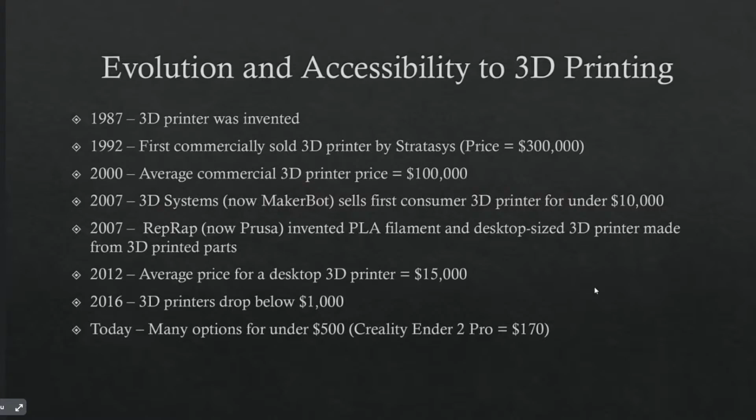Okay, before I get too far in, just kind of looking back on where 3D printing has been and where it is now. It's really advanced a lot in the past decade, but it actually started in the 80s, when the very first 3D printer was invented. Back then, as with most computer devices like printers, they were very large. It took up most of a room, and the first commercially sold 3D printer, later in '92, sold for $300,000.

So it wasn't something that the average Joe or the Elmer was picking up and doing these tiny little projects with their ham radio. So that was to come later. But as technology advanced, prices went down.

That kind of went down through all this. And 2007 was kind of a big stepping stone, with a lot of other brands coming online, as well as printers that were made up of 3D printed parts, which drastically dropped the price of manufacturing the 3D printer. And now these 3D printers can, for the most part, build themselves with the help of the few metal pieces and computer boards and stuff that come along with it.

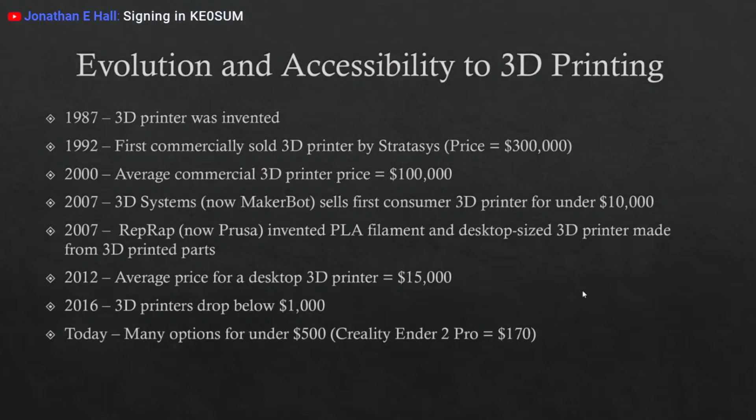So after 2007, pricing started dropping. In 2016, like I said, just 6 years ago, 3D printers finally started getting below $1,000, getting a little bit more affordable to the average consumer. And today, you can go to Micro Center or go on Amazon, and there's many options for under $500. For example, the brand new Creality Ender 2 Pro, their smallest entry level printer, is $170. So really low cost entry at this point. It's not what it used to be just a short 10 years ago. So cost of entry is pretty small.

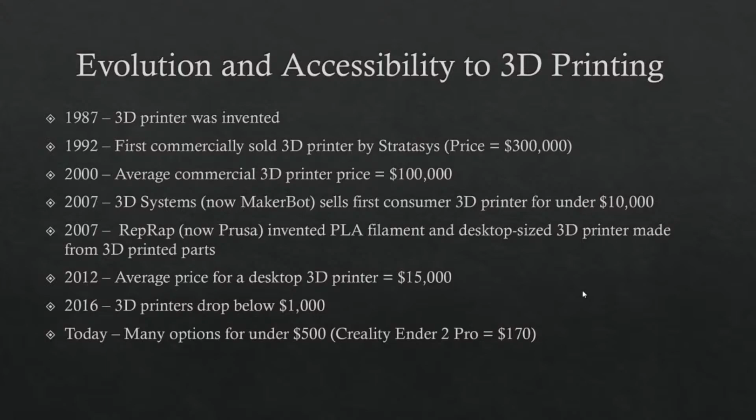But why would anybody get into 3D printing? What do you do it for? What I use it for, mostly, is very low cost prototyping. It's things you can print, try out, see if it works or not. And most of the time it's just a cheap filament, a biodegradable plastic that you can throw away or reuse or grind up and use again.

It's a chance to put your thoughts into a physical object without having to know how to use all the expensive woodworking tools or metalworking tools, and a huge shop with all those things, and a little bit more of a detailed product than gluing something together or cutting freehand. It's also something that you can produce in house. You don't have to wait for something to come in the mail or for shipping, and if you want something today to fix a problem or adjust a plug for one of your radios, you can print it today and have it today.

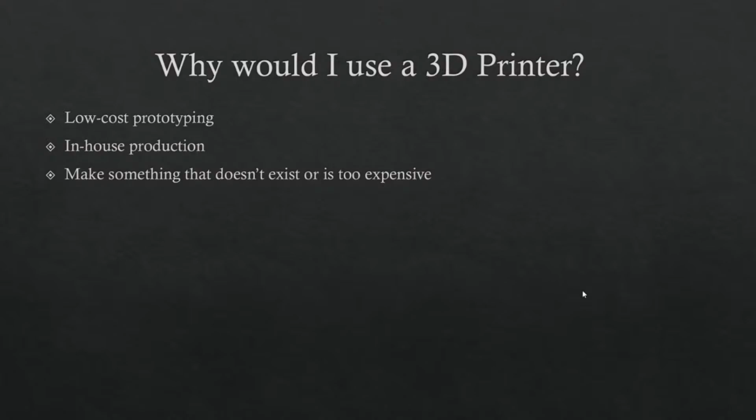And also, maybe this thing that you're thinking of in your head doesn't exist in the real world. And I know that happens a lot with ham radios. People are developing their own enclosures, their own mounts, any type of thing that we feel needs to fit this niche that either doesn't exist, or does exist but is way too expensive because it's made of aircraft grade aluminum, and it just needs to be this little thing to hold my microphone in the truck. So many reasons why you might justify getting a 3D printer.

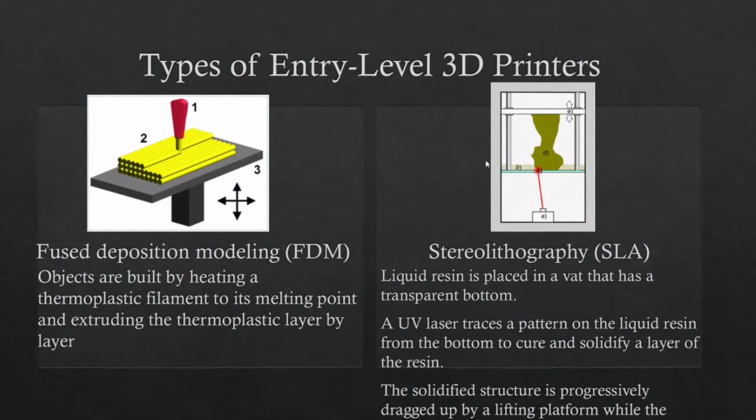So the types of 3D printers out there are at least a dozen different types, but for entry level, they're kind of down to these two. The first one on the left being the most common, fused deposition modeling. That's what you're going to see most people have. That's what I run. It's essentially you're melting a plastic filament, running it through a nozzle, and that nozzle is running on a controlled CNC rig to essentially lay out a pattern, a layer, think like a hot glue gun, and then raising it up a set distance and doing that layer again, building off of each other over and over and over until the final product is built.

The one on the right, still layer by layer, but how it does it is actually a bath of liquid resin, and a UV laser actually traces the pattern on a build plate, and that build plate is slowly raised out of the resin bath to build your product upside down. So essentially it's suspended from the build plate.

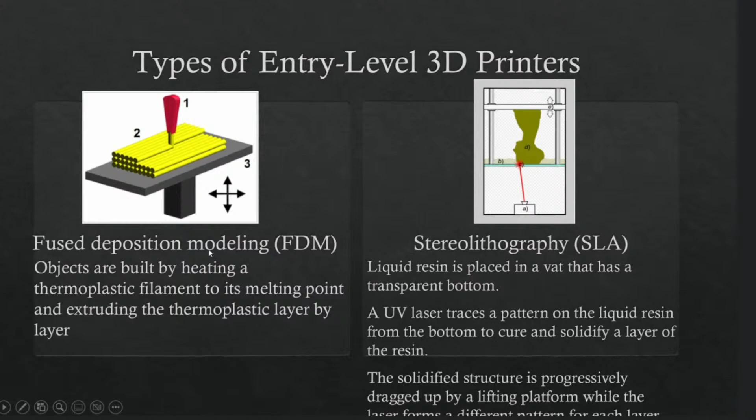Benefit of SLA resin printers, they're much more detailed, they're finer detailed. The cured resin is a much harder product, and so it won't melt or get soft in hot sun. SLA resin printers are typically used in medical, dental work, those types of things. But for 99% of consumers, myself included, the one on the left, FDM printers, is more than enough for what we use it for.

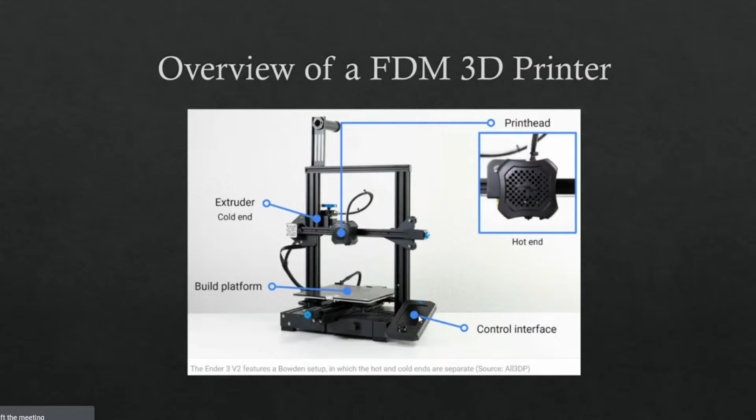So the ways you can be adjustable with FDM printers is the types of filaments you're going to use. Not only what color, you can use any color you can imagine, as well as gloss or matte or transparent or reflective, but there's also different plastic materials. Polylactic acid being the most common, PLA. It has the lowest melting point, so it's the quickest to melt. It's the easiest to work with. It's the cheapest. Like I said before, it's biodegradable, so when you're done using it, you can grind it up, you can throw it away. It's very easy to print. The settings are pretty standard, and any FDM printer off the shelf can run PLA.

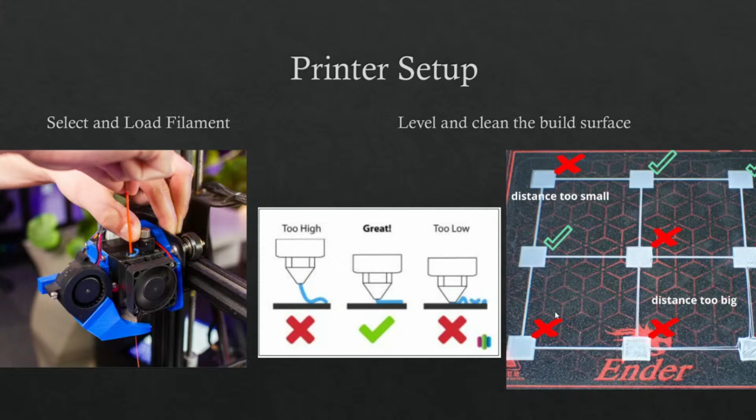So your filament is loaded. You've printed 1 or 2 or 3 bed leveling programs. Your printer is now leveled, loaded, and ready to print. But what are you going to print? You have an idea of something that you want to exist. Best thing to do is to start and see online and see if it already exists.

So there's many different databases online that you can search, Thingiverse being the one I use most often. You go on there, you just search like it's a Google engine, search for Yaesu or Toyota, whatever you're looking for, press search. It'll come up with all the files that somebody else has already designed and went through the effort to build up in their software, and it's all open source.

There are ones out there that the designer can sell, so you have to buy the file, but there are almost endless free options. The one time I've actually bought an STL file was, like I said, when I used TPU for that phone case. I wanted to make sure it was exactly for the iPhone 12, iPhone 10, whatever the phone was, and specifically made for TPU filament.

So it was a very specific need. Couldn't find it anywhere in the free files, so I found one that a person was selling for $2, paid for it, and it worked perfectly. So I threw out the term STL before I go any further. STL is the most common file format for a 3D model, for 3D printers.

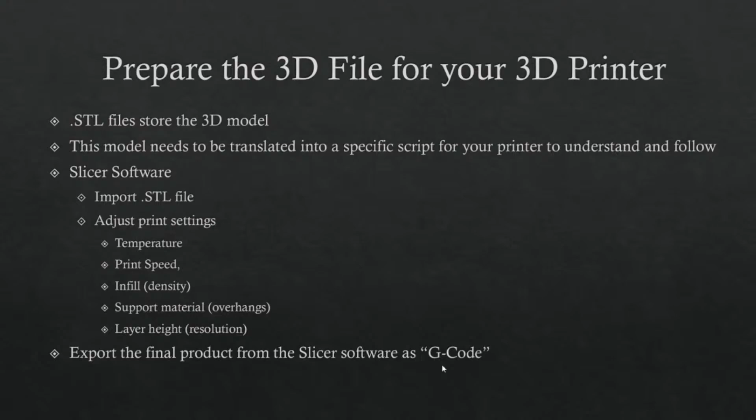So if you have ever used any CNC type machining, you'll probably recognize G-code because CNC uses the same term. It's just the programming language that any machine that's run off of a computer uses. So that G-code is basically going to list the commands in a certain order that that machine needs to follow. Everything such as setting the temperature, using the tool path, so where this tool needs to go, where it can't

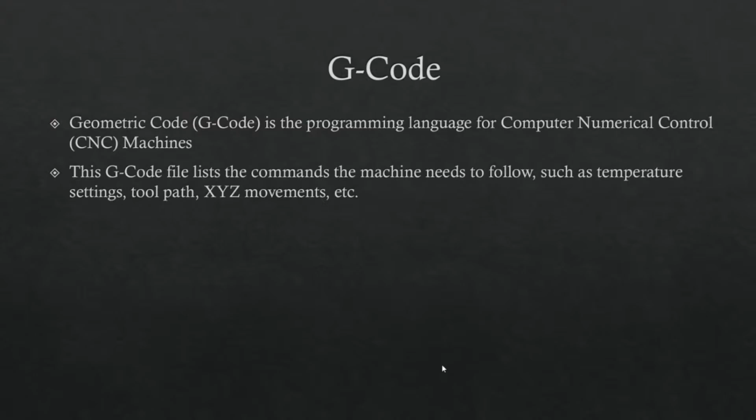go, all of the X, Y, Z movements for this entire product, and then when the print is done, where does the tool need to go and how does it shut down? So everything from start to end will be in this G-code file that comes out of your slicer program. So you have your object, you download the STL, you went into your slicer program with it, and you adjusted all the settings for your specific printer, exported to a G-code. Now it's time to put that into your printer.

The most common ways, you'll either have the printer plugged straight in with a USB cable like you would your traditional paper printer. You could save that G-code onto an SD card, a micro SD card, or just a regular SD card, and most printers have an SD card slot where you'll put it in that and use the interface on the printer to actually select the file out of that card and press print on there.

Or the third option is send it to your printer through the internet, which is the setup I have. It does require a second computer to be connected to your printer. So the setup I have is I actually have a Raspberry Pi that is dedicated to the printer. So it is connected to the internet and it is USB connected to the printer, so I can send things to the printer wirelessly.

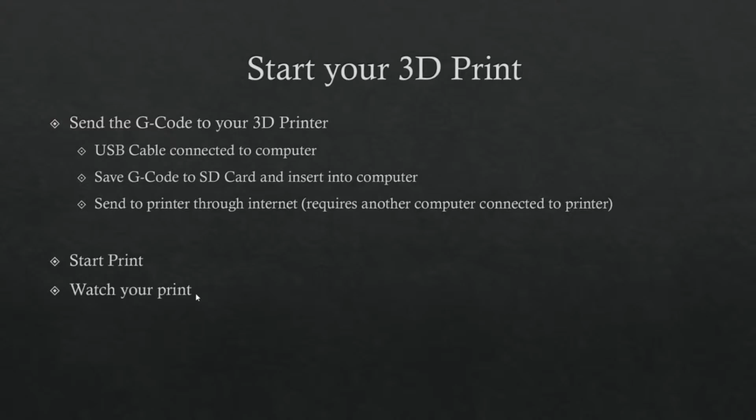So it's in your printer, start your print, and then the important step is to watch your print, at least the first layer, just to make sure that everything is going correctly, that you don't have any issues, the temperatures are right. Because usually if something's going to happen, it most likely might happen in your first one or two layers, either adhesion issues or a clogged filament or your temperature isn't right.

Which leads me to my next one, troubleshooting. Troubleshooting is guaranteed to happen if you're going to get into 3D printing. It's part of the hobby, I would say, but it is usually resolved within a few actions. So some common issues you'll run into: adhesion to your build plate. So your product is not staying stuck to your build plate. Either it's getting lifted up, or it might have just come off altogether to where it's no longer on the build plate anymore, and now your printer isn't printing on anything. It's just shooting plastic in the air.

Or warping. Warping is what you see on the right side here. So maybe the first layer did print fine, but then the second layer came on hot, and then as it cooled, that thermal pull lifted that corner off because, again, you don't have good enough adhesion on that corner.

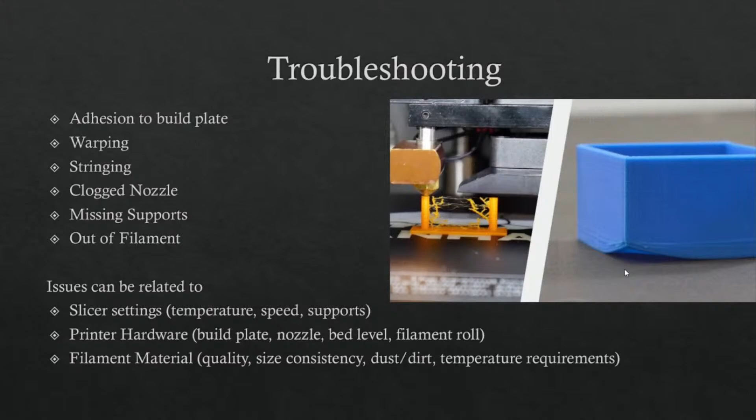Stringing is what you see on the left here. It's building, like I said, those two legs of a table. So it's building up this one, then it's going to go up and build this one, and it's going to go back and forth, and it seems to be just dripping a little in between each time. That could be something as simple as you're just not retracting the filament before each one, and that's another setting you can do in your slicer program.

Other problems: your nozzle can get clogged. You forgot to put supports on, and it's going to try to do the tabletop and just start spitting plastic all over the side, or you're going to run out of filament in the middle of the print. And hopefully your printer has an out of filament sensor so it'll pause. But either way, it means you need to put new filament in and hopefully be able to continue your print without any glitch.

Overall, most issues you're going to run into are going to come down to a setting in your slicer program. So you're going to go back and turn up the temperature or turn down the temperature. Maybe it's too hot, too cold. Just play around with it. Maybe you're going too fast, so maybe you slow down the speed of your print head. You forgot to add supports, so you need to add supports, or the infill wasn't enough. You need to increase your density.

So lots of different ways you can go back and trial and error. And again, that's part of this, and that's why PLA, low cost. You can print it multiple times to get it right. And usually once you figure out the unique intricacies of your own printer, you won't be having to go back and forth as often. It could also be a printer hardware issue. Maybe your build plate is just getting too old. Maybe you've printed on it too many times. It's just wearing out. Nothing's going to stick to it anymore.

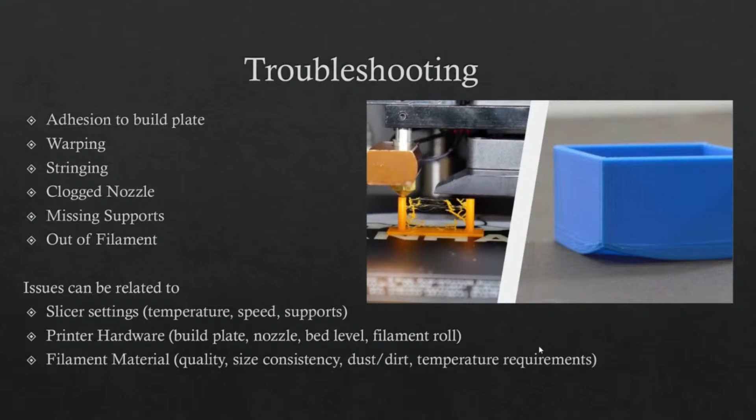Okay, so you went through all that, you printed your product, maybe it messed up and you had to go back and adjust some settings, and you sent it back to the printer and it printed just fine. So the printer spits it out, it's cooling off, so you're able to take it off the build plate. So there's going to be some post-print work that you're going to need to take care of. If you have support material, you're going to have to remove that, and sometimes that's easy, sometimes it's just on the bottom of the table.

Sometimes that support material is in a really tight little inside hole that you have to get in there with needle nose or tweezers or a razor blade and be able to get that out, because you wanted to make sure that that bolt hole was an exact circle and it was way in there.

You're going to want to assemble your parts. Being a 3D printer, the build plate is not big. You're about limited to a 10-inch by 10-inch square of build surface area unless you buy a bigger one. So a lot of times the way to get around that for bigger projects is you're just building them in pieces, and you can assemble them. Either they click together or super glue or other fasteners that are built into the print file.

If you want a clean finished product and you don't want to see tiny little layer lines, you can sand those smooth and prime and paint, and you'll never know that it was a 3D printed product. And a sharp razor blade or a scalpel is your best friend, just to clean up some little goops on the edge or on the sides where the nozzle had a little bit of a hiccup, just to make your product a little cleaner.

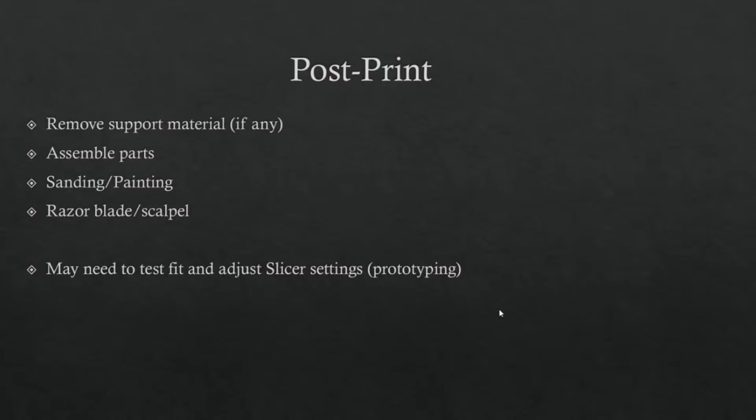Any questions from the slides so far?

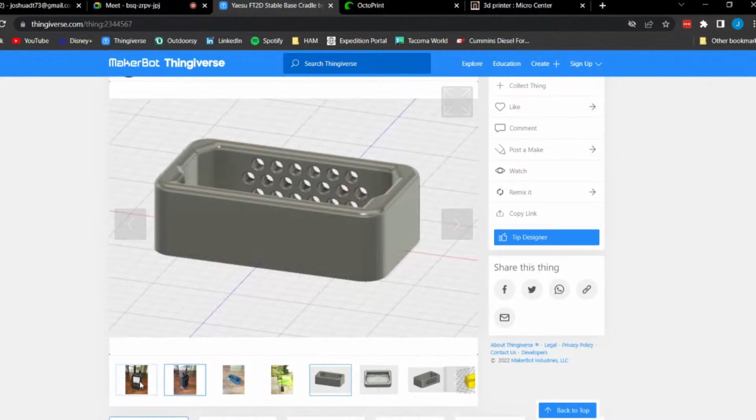Say, okay, I want to print that. You can come down and read. They'll tell you a little summary of what it is, why they did it. And usually the most important thing is you're going to come here and see their recommended settings. They'll say they use this printer. Doesn't really matter that much, but they'll say, yes, you do need supports. I printed it at this resolution.

That's the layer height, 0.2 millimeters, and I use 20% infill. Those are all pretty standard. 0.2 is just the standard resolution. 20% is your starting infill.

Rafts is basically if you have adhesion issues, you can have your printer print basically a base, like a stage first, before it actually prints the product to make sure you absolutely don't have any adhesion issues, to make sure it's absolutely level. You basically get all that out of the way with this sacrificial raft that you build under your object.

So you can go through here, look at comments and stuff like that, but I'm going to go here to the file. Looks like he did an update. He rotated it. So if I go to the files, you'll see he included F3D, which is a file that I can bring into a 3D modeling software. So I'm not going to mess with that right now.

Here's the STL file, but he said he did an update. So that's this one, version 2. He updated July 10th. So, okay, that's the file I want. I'll go ahead and click download on that one. Okay, so it's in my download folder.

So once it's downloaded, I'll go to my slicer software, like I said. So I use Ultimaker Cura. This is the slicer software. So this is where you're going to download whichever slicer program you want, put in what printer you have. So I have the Creality Ender 3. I'm using just a generic 0.4 millimeter nozzle, which is plain PLA, nothing fancy.

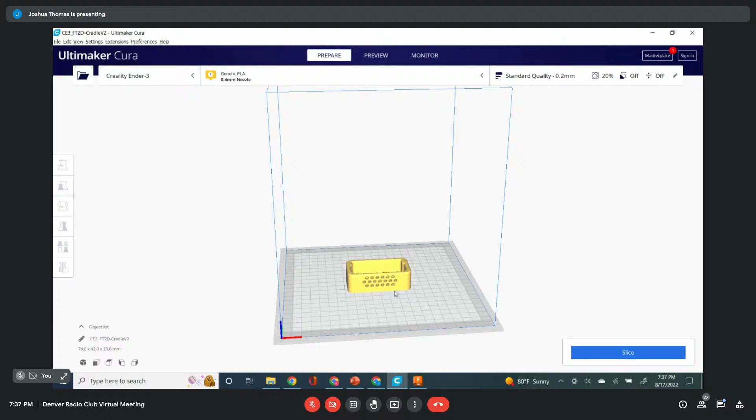And I'm going to find that file we just downloaded. So there it is right there. Okay, so that looks right. That looks like the base, the cradle we just saw on Thingiverse. So we're getting close. So now here are all the settings that you can adjust. So he said the resolution of 0.2 millimeters, and that's standard. If you wanted your layer height to be 0.16, 0.12, much finer quality, you can, but it's just a base for a radio. I don't think it needs to be too.

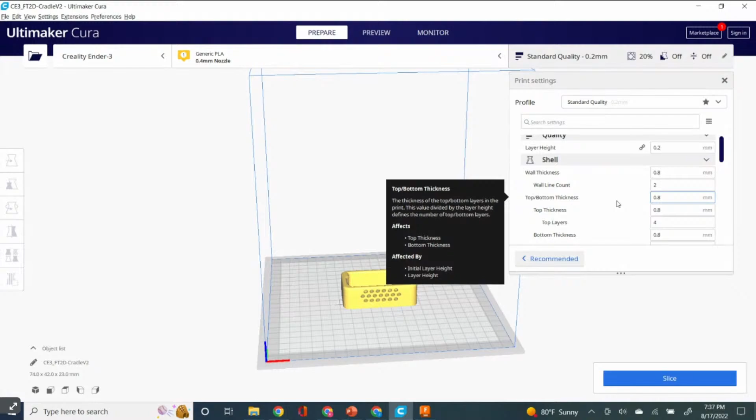Okay, and here's where you can adjust pretty much any parameter, and I would recommend keeping it at its default settings unless you want to play around with some of these settings. But you can adjust the thickness of specific areas around your object.

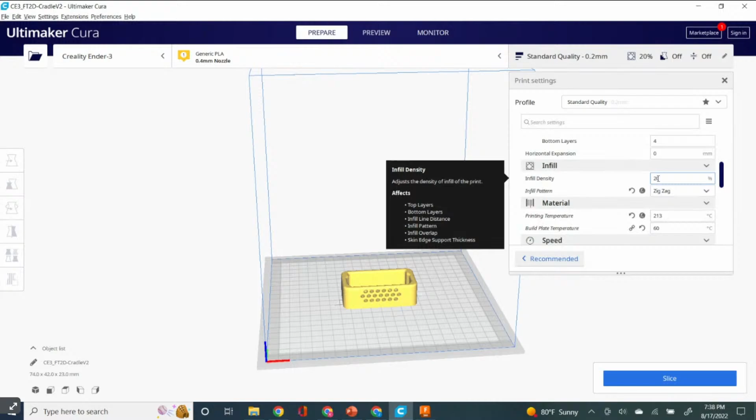Infill, like I said, this is where, if you want to make this super dense, you can up this to 100%, make sure the inside of this object is 100% plastic the entire time, 100% PLA or PETG, whatever you are printing. I'm going to keep that at 20% just to make for a faster print.

You can adjust the pattern. If you want to do it in grids, triangles, there's a whole bunch of different patterns. And they give you a little description here on what those each do. Reduce material cost, increase strength. So depending on what you want, we'll keep it at zigzag.

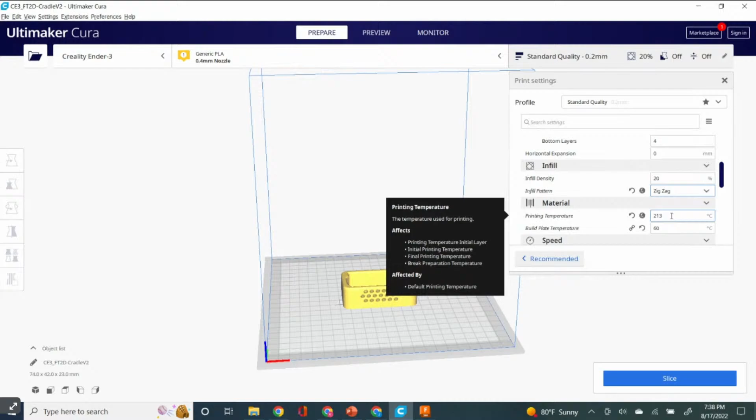Your temperatures you're going to get off of your PLA, your filament roll. They're usually going to say for PLA around 210 to 220 degrees Celsius. I've just been doing 213. It's been working great for me.

And same with my printer. I run my build plate at 60 degrees Celsius. Some people do lower if they're in an enclosure. Some do higher for different types of printers if it's a bigger build plate. But this seems to be working well for my printer.

The print speed is what's going to really affect how long this is going to take to print. So I have it where the head of my printer will be moving at 100 millimeters per second while it's going through and printing this. And that's because I've upgraded the stepper motors a little bit and the brain, the computer of it, a little bit to be able to handle a little bit faster speed. But typically 70 to 80 millimeters per second will be a good print speed.

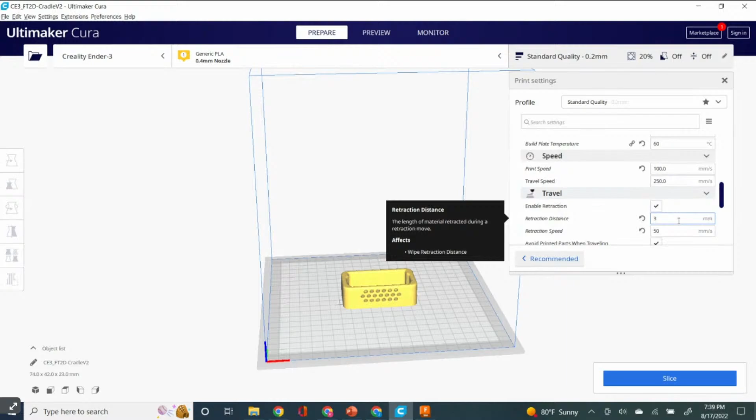Retraction. So this is where you saw the stringing troubleshooting. That might be because you're not enabling retraction. This basically means when it's done with a layer or when it's trying to go around a hole or moving around to the next piece of the print, it's going to suck the filament back up just 5 millimeters, just so that way it's not just dripping out while the head is moving away around the printed part.

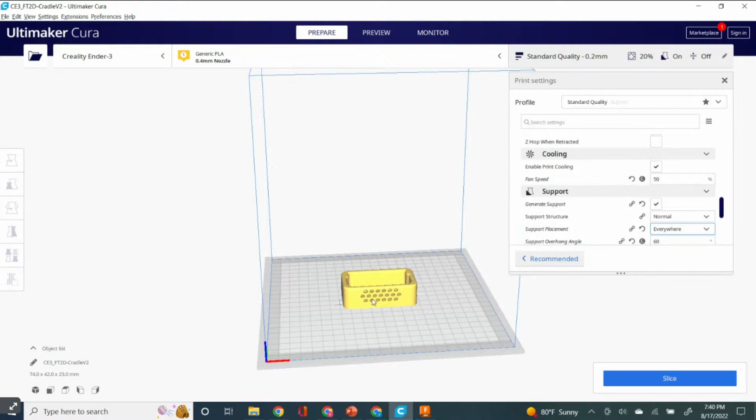And I make sure you avoid the printed parts when traveling. I don't want the head to break off a tiny piece or possibly break adhesion with the build plate. So a lot of settings in here. Support. So if you want support, go ahead and check that box. Where do you want it? Do you want it only where it touches the build plate, so everything between the build plate and your object? Or do you want it everywhere? Everywhere is going to mean it's probably going to be inside of each of those little holes as well, and that's going to be a pain to clean up.

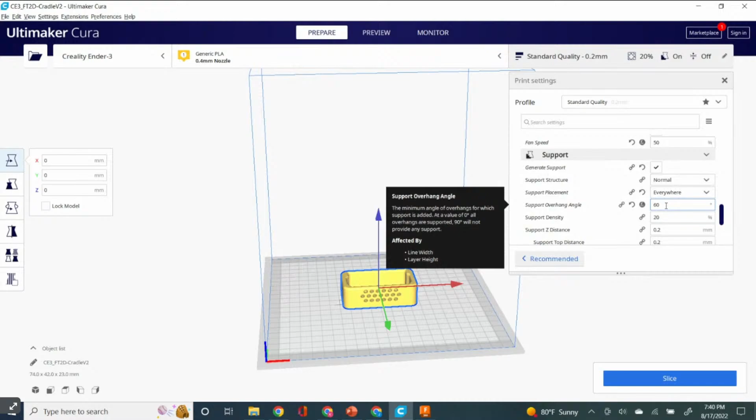And most of the time with holes, in my experience, I don't need support material because it is a gradual curve, and usually by the time it gets to the top, it's fine. So I'm actually not going to use support on this print, but you can turn it on, you can tell it where, and you can tell it to turn on for anything after 45 degrees. So my printer does fine up to 45 degrees, but once it gets past that, you need to start putting support material, or any other slope that you decide. So I'll turn that off.

And your build plate adhesion. So you can add other features, like I said, the raft type for increasing your adhesion. So a skirt, it actually says it all here. A skirt being it puts one line around it. I like the skirt just because it gives me one last check of the bed leveling, so I can watch that first line around the print to make sure, okay, it is definitely level. It should be good to go.

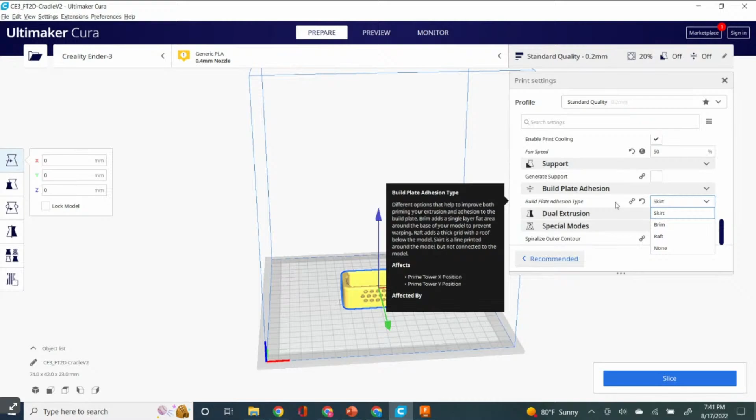A brim adds just a single layer around the object just to make sure you have good adhesion. And a raft, like I said, is an actual built-up stage, usually 4 or 5 layers tall, that gets built up first before it even starts your project. So we'll go ahead and say no build plate needed.

There are printers out there that have dual extrusion. That means either the head has 2 hot ends or you have 2 heads on your printer, and that could be handy if you want to do 2 different colors in your print, or you have the option of also printing your object while using support material with your second head. Why you would do that would be they sell water-soluble filament. So you can put a water-soluble filament in your support material head. That way, once your print is done, all you have to do is put your print in water and all of your support material will just melt away. So sounds nice. I don't have a dual extrusion, so that's never been a feature I've used.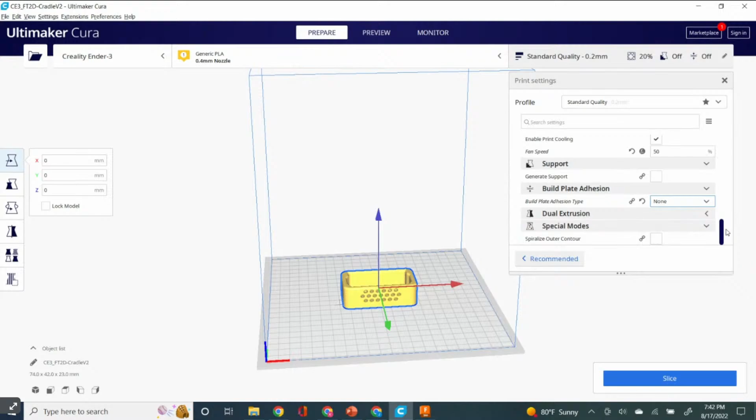So you get all the settings in. You think you got it right. You're going to tell it, go ahead and slice this object. So it's going to think, it's slicing it all out. Okay, it's done. It's going to take 2 hours to print. It's going to use 21 grams of filament, which 2 hours might seem a lot, but compared to running to HRO and back, 2 hours isn't that bad.

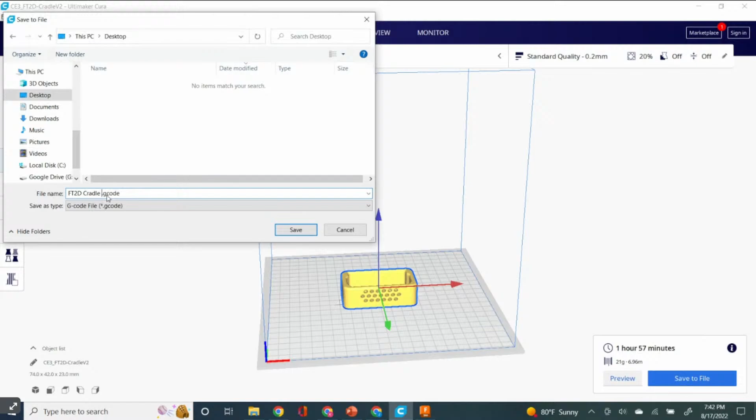So I'm going to go ahead and save that file. I'll just put it on my desktop. You can call it something. I'll call... Josh, can you show the preview? Yeah, I can. I'll just save on here. So 2 hour FT2D cradle print. So I'll save on desktop for later. There you go. File saved.

Yeah, so here's the preview. So here you can play through what the printer is going to do. So all the way down. Let's go to the very bottom. So the printer is going to, it'll actually show you the toolpath, how it's going to print. And it's pretty slow, but we'll drag it out. So it's going to build that whole bottom, just like that. And it's going to keep building up layer by layer. So the base will get built. Then it'll start the walls. Make sure to work around all those holes for the speaker to still work.

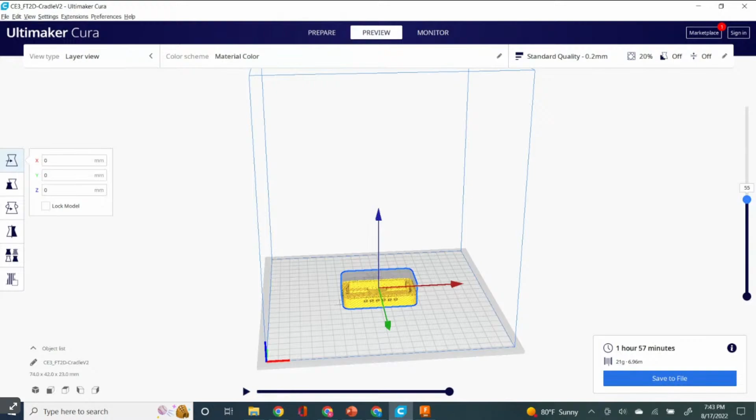And then finish up at the top with a nice taper. And that's essentially what your printer is about to do. So you saved it, and from there is where you would grab that G-code file. I saved it to the desktop. Go ahead and either put that on the SD card that you're going to put into your printer, or you're going to send it to your printer via a USB cord, or like I said, mine is

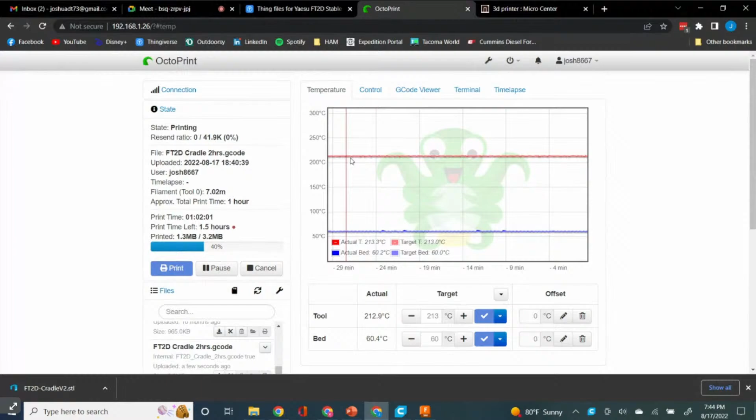connected. So here is my printer actually printing that right now. So I came over here, I dropped the file in here and told it to go ahead and print. In here I can see the tool temperature and the bed temperature, and I can adjust those from here. I can see on the webcam how the print is going. Here's the skirt, the one line around the base just to make sure that it was perfectly level. And I can adjust things, turn the fan on more. I'm not going to touch it because I felt the slicer program had good settings.

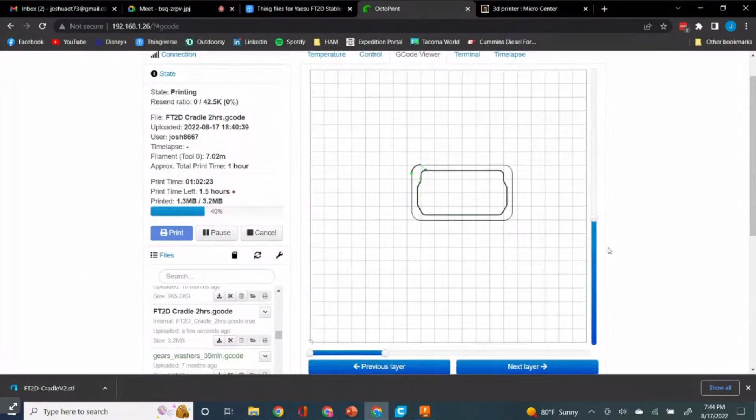And you can actually see the G-code that we just talked about here. So here is the current layer, how the tool is going through. We can see how it's doing every single layer of the print as it goes through, all the way to the end product. And that is it. So it's still 40% done, so it still has an hour till it's done. But when that's done, the printer will shut off, and I can pull that off the build plate and hopefully just slide the FT2D right into it and have a solid mount to put it in.

That's all I had. Anybody have any questions or anything else they wanted to look back at? Any questions, anybody? You did a great job.

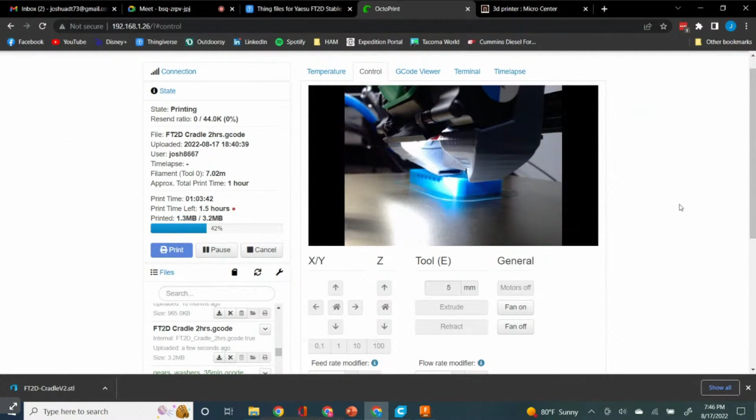Thanks. How do you get it off of that base? Yeah, so it pretty well adheres to the build plate. Most printers come with a tiny little spatula. You'll pry under it to get it off. As soon as you break the adhesion a little bit, because it's a rigid plastic product, it'll come off.

Okay. This build plate that this printer is currently printing on is a magnetic flexible bed, which is very nice because all I have to do is pull this thing off that's magnetically put on and just flex it. It's basically a stainless steel flexible build plate. So I just bend it a little bit and this rigid plastic just pops off because it doesn't want to flex with the metal.

So yeah, adhesion is probably going to be your biggest enemy with 3D printing. You're either going to buy a different type of build plate that has good adhesion, or some people use glue sticks or blue painter's tape to try to make a more abrasive surface. And the more you use your build plate, the more you're going to lose that adhesion property, and you're going to go through build plates eventually. Okay, interesting.

Any questions, anybody at all? Yeah, I prefer to use a pane of glass that I got at Home Depot, and I like Aqua Net. Oh yeah, I've heard good things about glass too. I wouldn't try bending the glass, but yeah.

A question for using the Ender: one thing I haven't done is ABS. Aside from getting the enclosure and venting it, is there anything else you need to do to be able to print ABS? Because like you said, when you put stuff in your car, that's the biggest downside. PLA is really easy to print with, but for a lot of things, ABS or something like that is where you need to go. Or is there an alternative to ABS where you don't have to deal with toxicity?